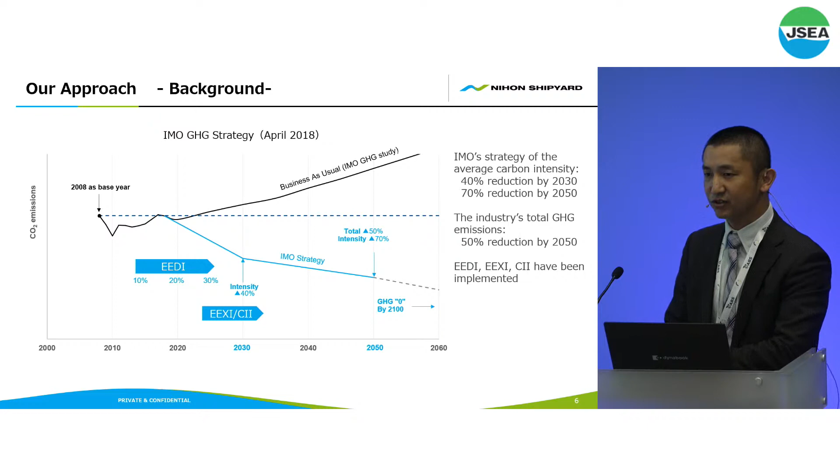We can't discuss net zero society without carbon neutral and low carbon fuels. However, methanol and ammonia require significant time and cost to expand production and supply chain. Therefore, heavy fuel oil, including biofuel, and LNG, will keep dominant until 2030.

So we will focus on developing better EEDI vessels using conventional fuels, while developing dual fuel vessels to meet market demand. That's our approach.

Improving propulsion performance is always very important regardless of fuel used. We have a lot of experience and know-how over many decades to improve ship's hull form and energy-saving devices.

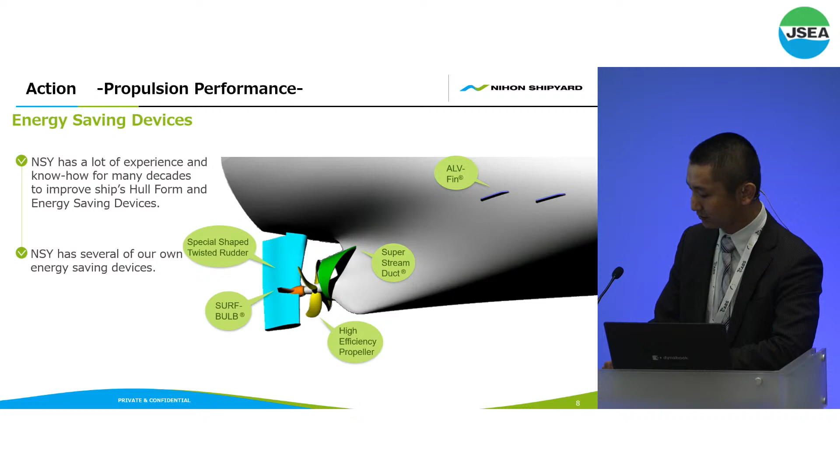These are our energy-saving devices. These devices improve energy efficiency, and we continue to improve and consider the combination of the devices.

In addition, we have been working on reducing additional resistance due to wind and waves for more than 20 years. To reduce added resistance due to waves, we developed the most suitable bow shape for each occasion.

These are our original bow shapes. The Leadge bow and SP bow are new types, and the Axbow is a slightly older type.

We confirmed the performance of the Axbow. The speed loss in waves is clearly better than the ordinary bow.

This is one of our latest accommodation houses. The round shapes of the accommodation reduce additional wind resistance.

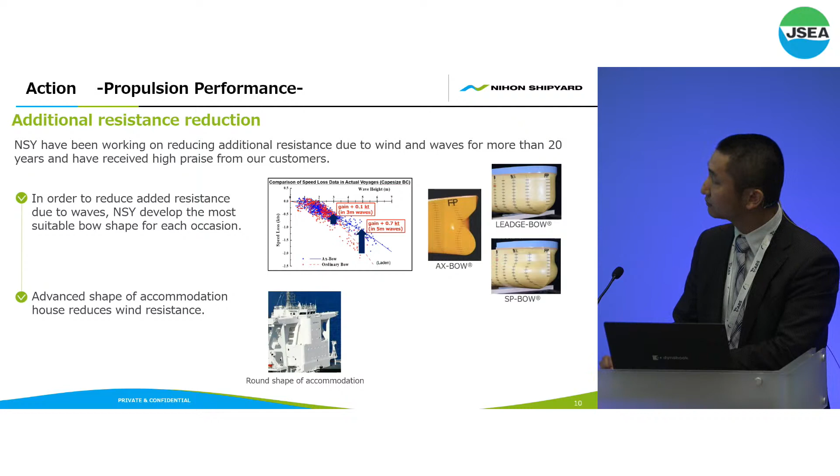As I explained earlier, we are also developing alternative fuel vessels. For LNG, we are building the car carrier and Newcastle Max.

For methanol, our group company, Minami Nippon Shipbuilding, built a methanol-fueled MR tanker in 2016. Recently, we are studying the methanol dual-fuel bulk carrier according to the customer's request.

For ammonia, Nihon Shipyard is developing ammonia dual-fuel vessels in two projects. We are developing an ammonia dual-fuel ammonia LPG carrier in the Japan brand engine project. In this project, Japan Engine Corporation is developing the main engine, and IHI Power Systems is developing the auxiliary engine.

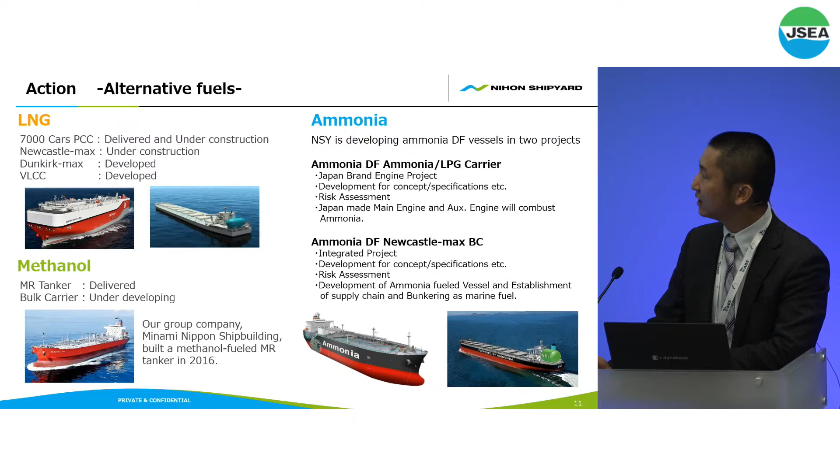In the other project, we are developing an ammonia dual-fuel Newcastle Max bulk carrier. In this project, MAN as the licensor and Mitsui E&S Machinery as the licensee are developing the main engine.

On the other hand, we started feasibility studies on several GHG reduction technologies. These are not our own technologies; we are studying them through discussion with the manufacturers. For example, we confirmed the installation availability and effect of the onboard carbon capture system for a Suezmax tanker.

I will explain our monitoring system. The Sea-Navi 2.0 is our cloud-based subscription service which provides a data monitoring and operation support integrated platform for voyage optimization and safety operation. We can also use the Sea-Navi monitoring data to evaluate GHG reduction technologies in actual sea conditions.

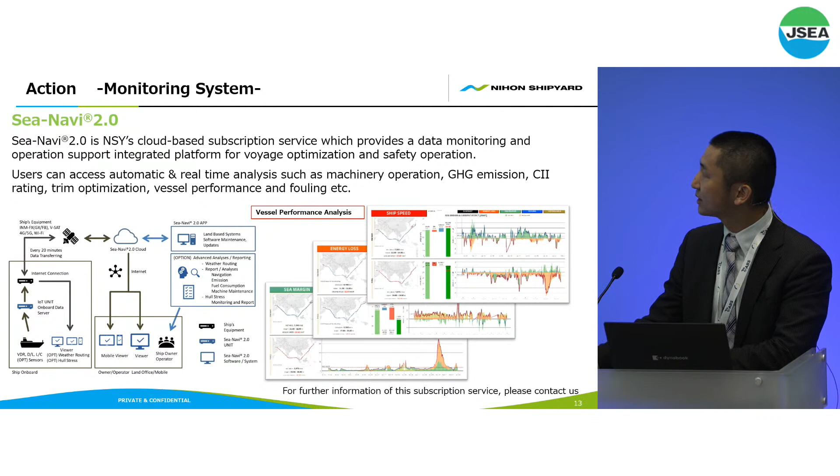We also implement other activities for net zero. One of them is the liquefied CO2 carrier. Mitsubishi Shipbuilding and Nihon Shipyard have started a joint study for the development of an ocean-going LCO2 carrier.

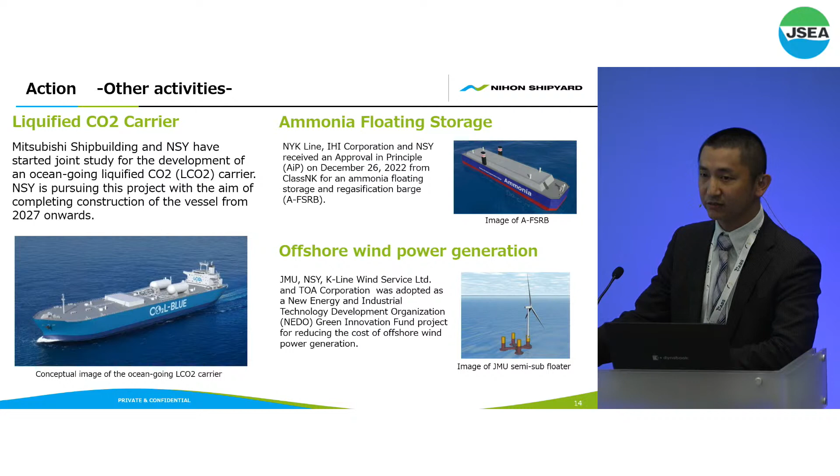So this is the summary. Please remember Nihon Shipyard is a joint venture company between Imabari Shipbuilding and Japan Marine United, and please remember the meaning of Nihon. This is our approach: we will focus on developing better EEDI vessels using conventional fuels while developing dual fuel vessels to meet market demand.

That's all for my presentation. Thank you for listening.

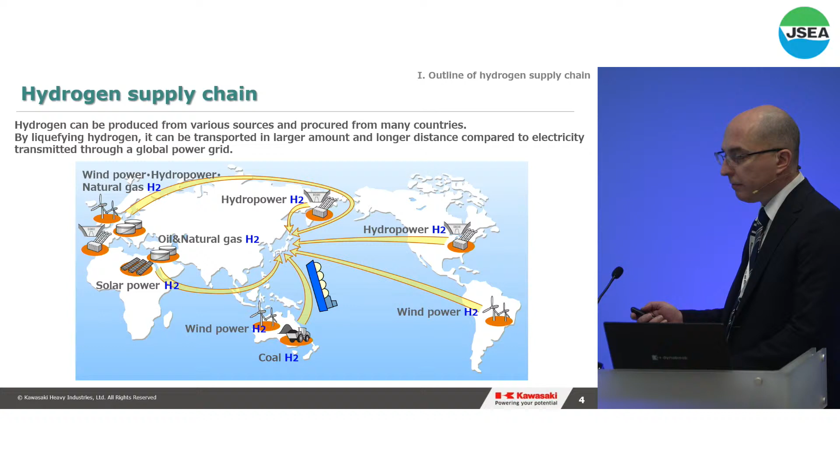This is the concept of a CO2-free hydrogen supply chain, which was announced in 2010. The objective is to establish a stable supply of hydrogen while suppressing CO2 emissions in the process of production, transportation, storage, and utilization throughout the entire supply chain. Hydrogen is to be produced using renewable energy sources and also from fossil fuel paired with carbon capture storage systems, in which all the CO2 produced is stored underground. Then the produced hydrogen is to be transported to Japan by liquefied hydrogen carriers, finally reaching the consumers, which includes power plants, transport, and industry.

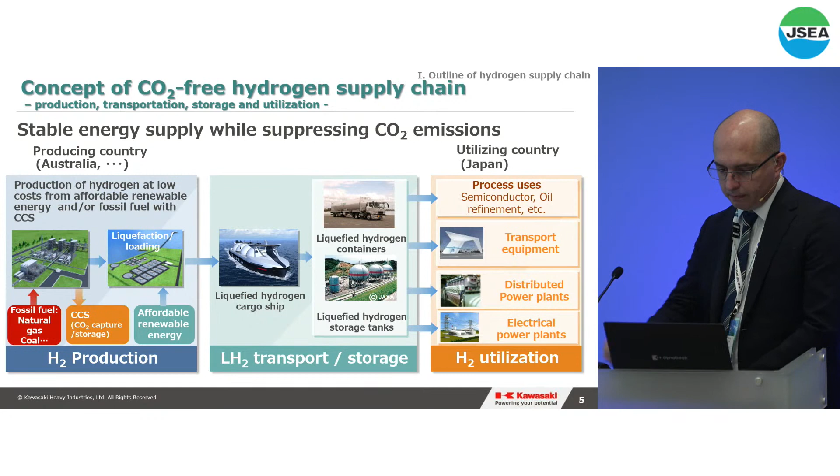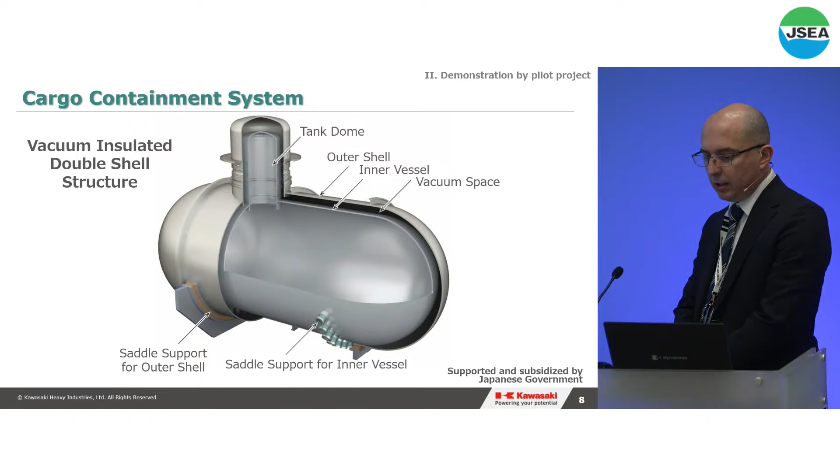Here are some details about the cargo containment system. The temperature of liquefied hydrogen is very low, at minus 253 degrees Celsius, and the latent heat of hydrogen is also very small. Therefore, a high-performance insulation system is required. To deal with this, the tank was designed with a double wall structure. This cargo tank is categorized as Type C by the IGC code and is designed so the boil-off gas during the entire voyage can be fully accumulated. Regarding materials, the inner vessel of the tank is made of stainless steel, and the saddle support is made of glass fiber reinforced plastics, which has excellent thermal insulation and strength. With these specifications, we can suppress heat ingress and make possible long-distance marine transportation of liquefied hydrogen.

After construction of the ship, we conducted several demonstration tests in 2 phases. In the first phase, tests of loading and unloading were carried out with liquefied hydrogen for the first time, followed by tests during a full load trial voyage in Japanese coastal waters. In the second phase, technologies for long-haul transportation were tested while transporting liquefied hydrogen between Hastings, Australia, and Kobe, Japan. Through this series of demonstration tests, we successfully verified and validated all aspects of long-haul transportation, including the safety and technologies used in this vessel.

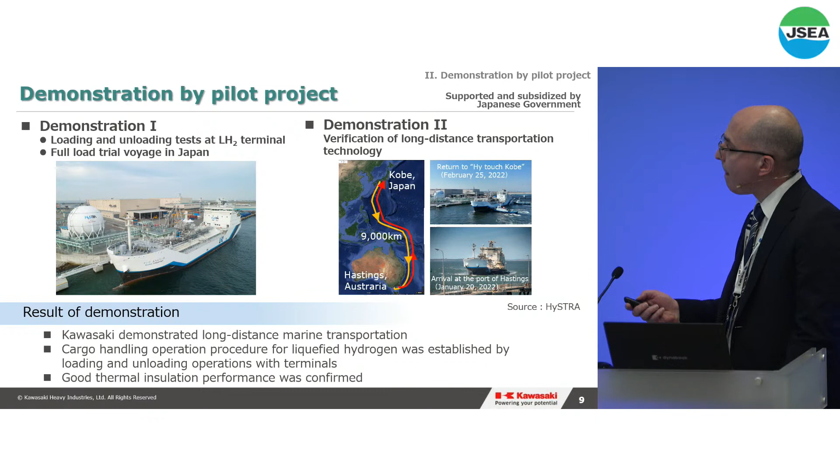So moving on, in the last part of the presentation, I would like to explain our actions to the establishment of a commercial scale hydrogen supply chain.

Now we are proceeding with the hydrogen supply chain commercialization demonstration, a project supported by the Japanese government's Green Innovation Fund, running from 2021 to 2030. In this project, we will demonstrate a series of aspects of the international liquefied hydrogen supply chain, from manufacturing to transportation and storage of carbon-free hydrogen, on a scale of several tens of thousands of tons per year. Our target is to achieve the first full-scale commercialization of hydrogen after 2030, and to show that the technologies to scale up are available, including large-scale marine transportation with competitive costs.

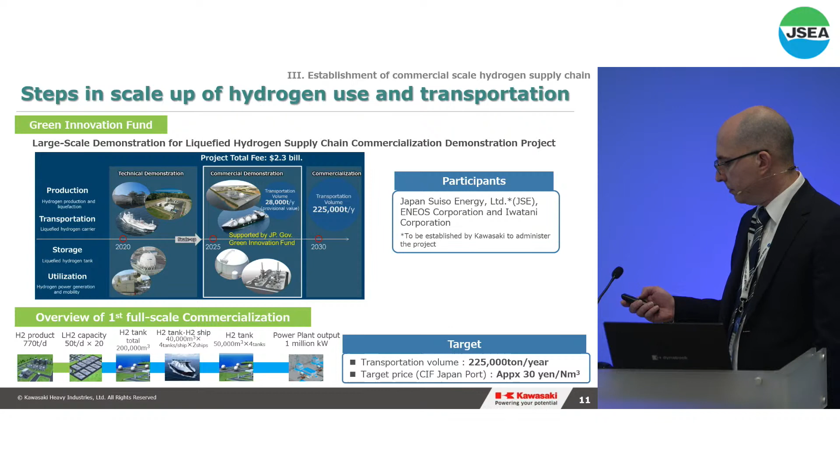For the commercialization demonstration project, Port of Hastings in Australia and the Kawasaki coastal area were selected. In addition, an MOU aiming to advance the establishment of a liquefied hydrogen supply chain between Japan and Australia was signed by major Japanese companies at the Asia Zero Emission Community in March 2023.

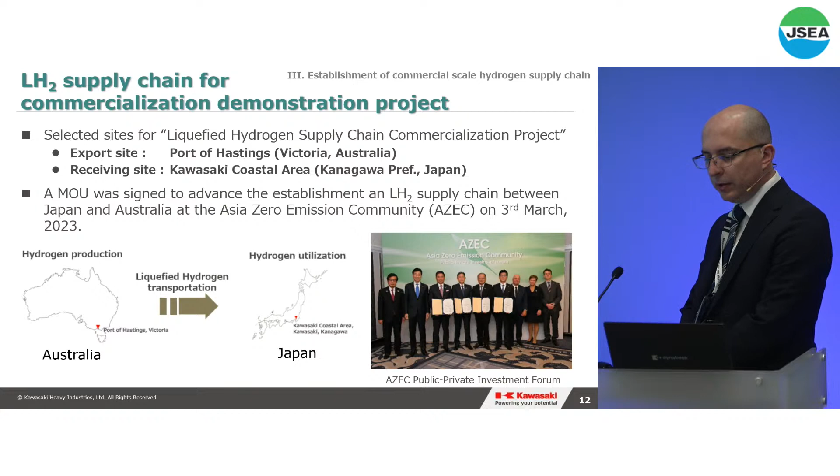Starting last year, we built a half-size tank at our Sakaide shipyard, about 25 meters in diameter, where we carry out gas replacement, cool down, and heat up tests. Through these tests we were able to establish the operational procedure for this newly developed cargo containment system, and confirmed that the heat insulation performance can be achieved as planned.

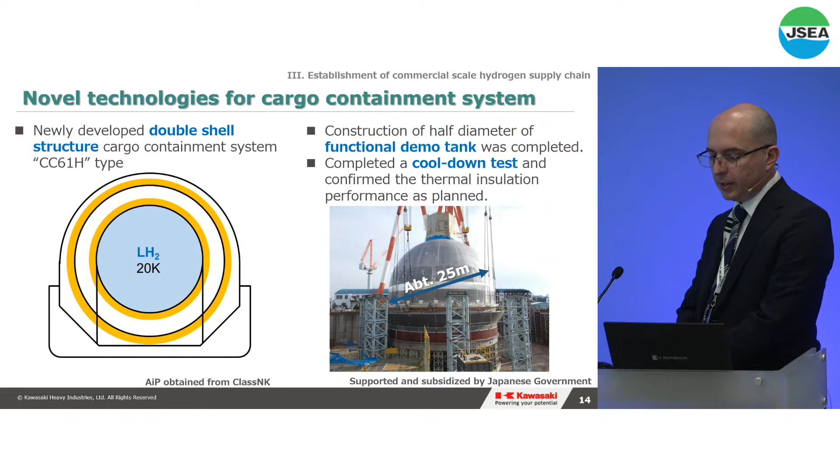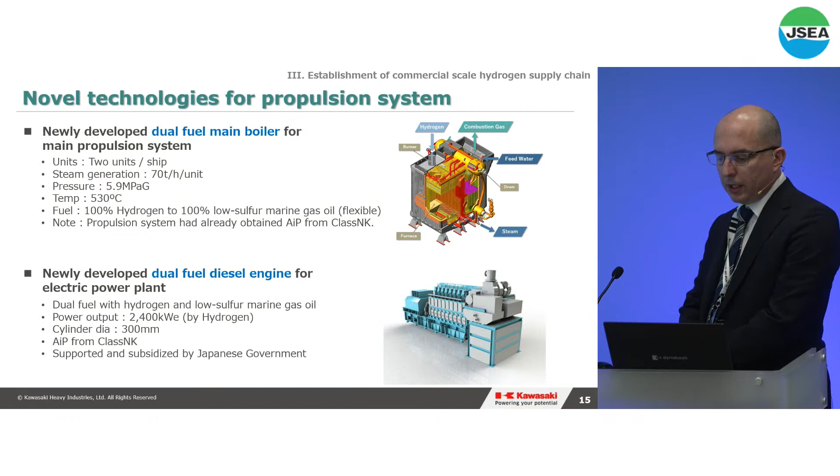Another novel technology here is in the propulsion systems. The two major pieces of equipment are the hydrogen dual fuel boilers and the hydrogen dual fuel engines. With the use of hydrogen as fuel, zero emission can be achieved. Regarding the boiler, the key component is a hydrogen burning burner, for which the tests were completed in 2021. As for the engines, we are developing a hydrogen reciprocating engine for the electric power plant of this vessel. This engine will be installed on the large-scale ship for demonstration purposes. Both are core technologies developed by Kawasaki.

In addition, we are sure that we can develop middle-sized liquefied carriers in accordance with market needs. We are considering the possibility that, in the early stages of commercialization, vessels with capacity ranging from 20,000 to 60,000 cubic meters will become the major size in the liquefied hydrogen market. These middle-sized carriers will be developed by fostering the technologies and expertise obtained through the development of Suiso Frontier, our small vessel, and the large liquefied hydrogen carrier.

We believe our own wide range of technology will cover various sizes of cargo containment systems. An optional cargo containment system can be selected according to project requirements, by scaling up our small tanks or scaling down our large tanks, which are two existing and proven cargo containment systems.

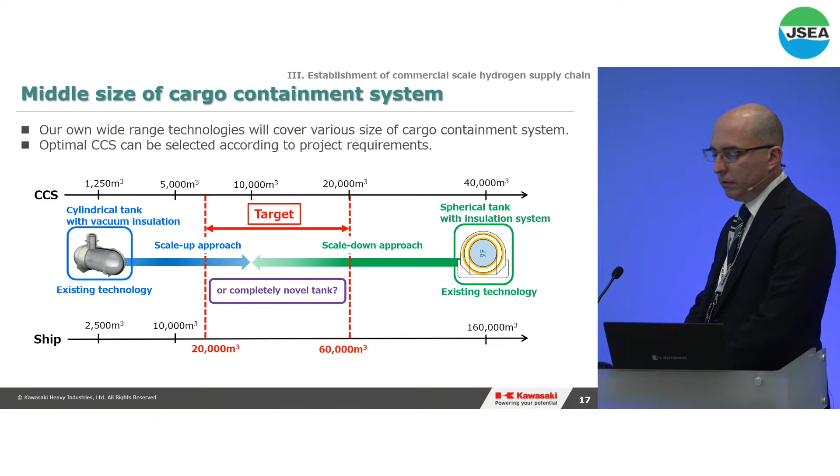To summarize my presentation, we believe these are the keys to the future. First is the hydrogen supply chain. As I said, hydrogen can be produced around the world from a wide range of energy sources, and we believe the liquefied hydrogen carrier is one of the key components to establish the supply chain, because it can transport a large amount of hydrogen efficiently.

The second key point is the Kawasaki pilot project. Kawasaki has completely demonstrated long-distance marine transportation of liquefied hydrogen with its first ship, Suiso Frontier. We also demonstrated that the cargo handling system is functional, and demonstrated the procedures for it during loading and unloading operations.

The third point is the scale-up of the ship. We believe scale-up is essential to reduce hydrogen costs. A wide range of technologies to achieve this scale-up will be available soon, and we are sure that Kawasaki can provide various sizes of liquefied hydrogen carriers, from small to large, in accordance with market needs. So Kawasaki will use its own advanced technology to contribute to a carbon-neutral society.

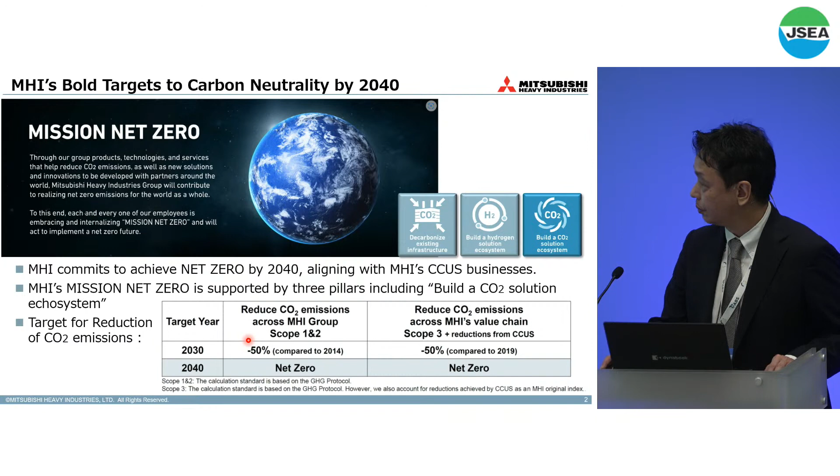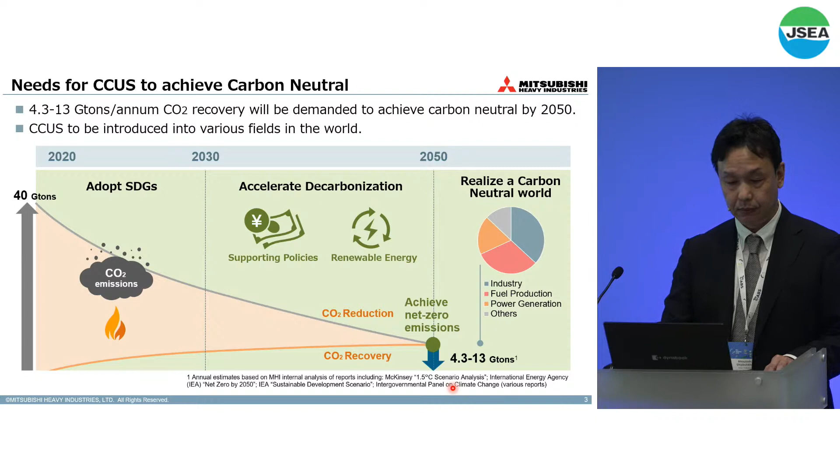Next, let me explain our idea for the CCUS framework. We think one of the reasons why CO2 recovery is progressing slowly is that the destination of captured CO2 is limited. For this reason, we have begun efforts to cover the entire value chain, not only for capture, but also for transportation or conversion. Let's say CCTUS, although T is not included generally - we address 3 frameworks for these 4 areas.

The first one is contain. This framework covers capture and storage. In other words, it means a method by which CO2 is not emitted into the atmosphere. Currently, our group has a global share of more than 70% in CO2 capture from flue gases, and we believe this is our strong point.

The second one is connect. This means connecting each component in the CO2 entire value chain in order to establish an extensive and economical ecosystem. We think connect is very important to achieve the entire CO2 value chain, and liquefied CO2 carriers are included in this framework.

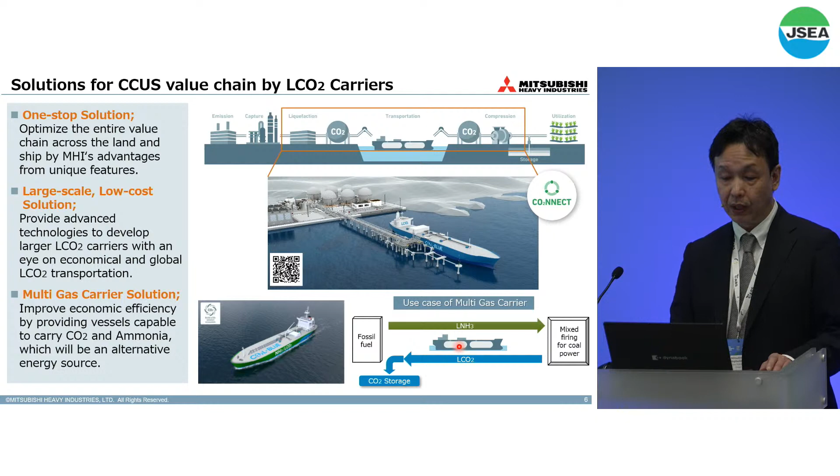Third point is the development of multi-gas carriers for ammonia and liquefied CO2. Most existing energy carriers, such as crude oil tankers, LNG carriers, and LPG carriers, are laden only in one way and return in ballasted condition. So we are focusing on developing multi-gas carriers that can carry ammonia and liquefied CO2 in a round trip, optimizing total economic efficiency of transportation and providing wide flexibility in fleet management.

Let me explain the technological development for large-scale liquefied CO2 carriers a little more. Mitsubishi Shipbuilding has accumulated various advanced technology through the construction of many liquefied gas carriers. We believe these technologies, such as numerical simulation, gas handling technology, and material evaluation technology, could be effectively utilized to resolve technical issues when large and economical liquefied CO2 carriers are developed.

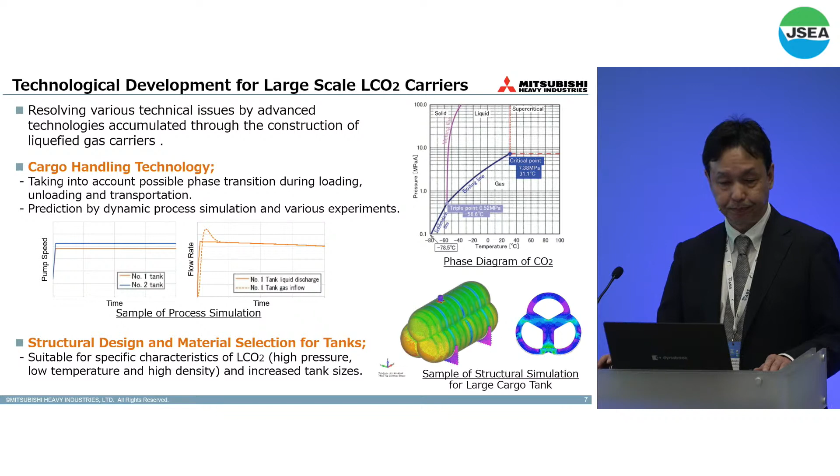In addition to the challenges introduced so far, Mitsubishi Shipbuilding has already started building an actual liquefied CO2 carrier for a Japanese demonstration project of CO2 transportation. The vessel, currently under construction at our Shimonoseki shipyard, is scheduled for completion at the end of this year and will start transportation of liquefied CO2 from Kyoto to Hokkaido from 2024. We expect various knowledge and information will be obtained through this project, integrated into gas handling technologies for tomorrow's large-scale, low-cost transportation by liquefied CO2 carriers.

In this slide, I'd like to introduce our activity on development of an onboard CO2 capture system. As a joint project with Kawasaki Kisen and ClassNK, the onboard CO2 capture system was mounted on an actual vessel and demonstrated for the first time in the world in 2021. In this demonstration project, Mitsubishi Shipbuilding conducted marinization of the system using our group's CO2 capture technology for land use. As a result, CO2 capture function from ship's exhaust gas was confirmed to achieve prospective performance.

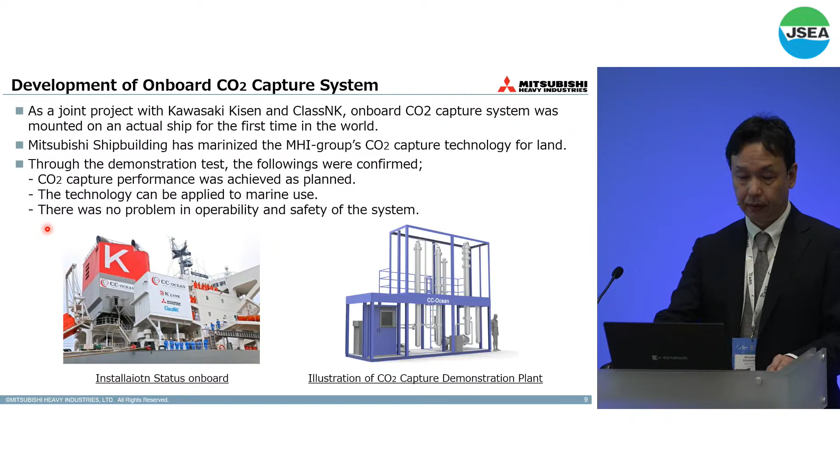Lastly, let me introduce Mitsubishi Shipbuilding's future vision named Marine Future Stream. This is our vision for 2050, setting the goals of a safe and secure future for society and decarbonization of the maritime economy. We will realize this vision by generating ideas for marine-related innovation through backcasting and bringing new technologies and services to life. The detailed pamphlet is available at the Mitsubishi Shipbuilding booth, so we would be very happy if you can visit our booth after this.

As we know, the International Maritime Organization aims to reduce emissions from international shipping by 2050, and this goes for us all. So what can we do? I think we have to find ways to practically implement from ideas to solutions, from test and demonstration projects to commercially viable products, and that is not always easy. I am so impressed by the 2050 roadmap you have towards net zero shipping in Japan for international shipping, and I'm very interested in following Japanese companies and how you tackle the 2050 challenges. The 2050, 2030 challenges are a shared challenge, and where there are common challenges, there should also be ample opportunity for more collaboration.

So I'm thankful for the opportunity to give an overview of the maritime sector in Norway, together with some encouragement for future partnerships and collaboration on environmentally friendly technology in the maritime sector.

The ocean and ocean industries are very important for job creation in Norway, as in Japan. Traditionally, the maritime industry has accounted for 30% of Norwegian export earnings, excluding oil and gas. More recent figures tell us that Norway's sixth largest export market for maritime solutions, equipment and services is Japan, a very important market for Norway, not only because of exports but because we have many important and dear collaboration partners in Japan. An important point to mention today, to understand the nature of the industry, is that it is a bit cyclic in its nature, as I will explain.

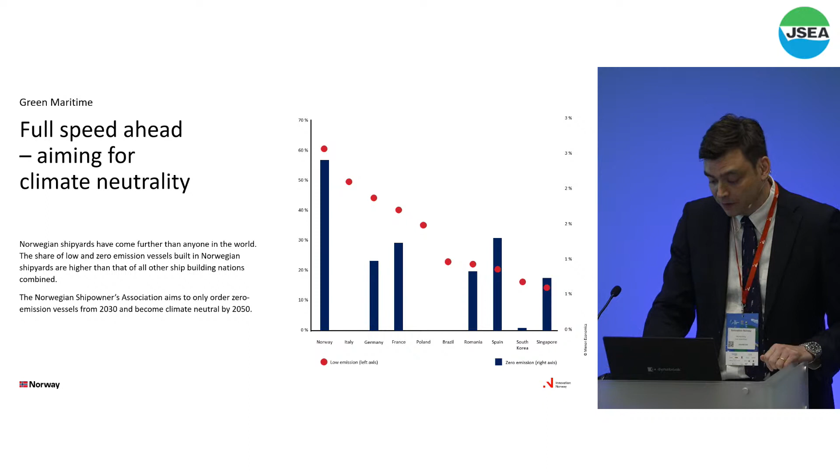Very short about the framework that we have to operate in Norway, and I like to call them drivers for change - all markets have change drivers that speed up change. We see that government ambitions in Norway are also paired with government support. When policymakers set ambitious regulations that stimulate and stipulate environmentally friendly ship use, not only piloting and testing but also commercial implementation in the maritime transport infrastructure, we see that in Norway, regulations can actually stimulate innovation.

The example I will use is the environmental requirements in the ferry tenders in Norway, and that has been a very strong driver in the Norwegian market.

In the ongoing green transition, we have many chicken and egg situations. Let us take one example from the onshore power infrastructure support for electric vessels. The phasing in, or the ambition for phasing in electrically powered ferries and speedboats, has been a key part of the Norwegian government's ambitions and goals for fossil-free public transportation by 2025, and also halving emissions from domestic shipping by 2030. So how are they doing it?

There is a requirement of low or zero emission solutions for ferry and speedboat services in the national and county transport service network. There is public support for the development of electrically powered ferries and speedboats, and support for establishment of dedicated charging facilities on ferry and boat routes. Similar schemes exist for shore power, where support can be applied for investments in infrastructure, pre-projects, and vessel conversion. It is Enova, the Research Council, and Innovation Norway that have been funding agencies in Norway for this.

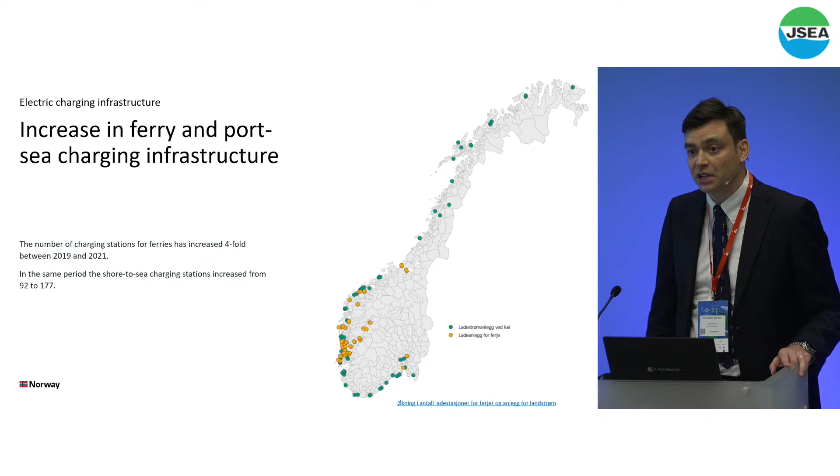Since between 2019 and 2021, the number of charging stations for ferries has increased fourfold in Norway, and in the same period, the number of shore-to-sea charging stations has increased from 92 to 170 or 177. Now the question remains, how can we do more on a larger scale to accelerate this development and commercial implementation of climate-friendly technology in the maritime sector.

This is very important for the private sector, turning ideas into business. Many, if not most, of the world's first projects in Norway are collaborative projects, with many non-Norwegian brands and companies involved, as can be seen among the members of the clusters. I believe leading projects come from selecting the best technology and the best partners, and I believe we have ample grounds for finding good collaboration opportunities between Norwegian and Japanese companies as well.

As you may know, for strengthening the maritime commercial relation between Norway and Japan, we have a framework for collaboration already in place. This is an MOU, Memorandum of Understanding, between the Norwegian Ministry of Trade, Industries and Fisheries and the Japanese Ministry of Land, Infrastructure, Transport and Tourism from 2011. So this gives us a mission and signals what we should do, and that is to support you in finding partners and collaboration.

This is why we're honored to be able to interact with you here today. We are thankful to the Japan Ship Exporters Association and other involved companies for creating this arena in the bilateral Norway-Japan dimension here today, where companies can share and meet each other and find new partners for tackling the same environmental challenges. Hopefully we can see more Norway-Japan partnership in the future. You can get in touch with us in Tokyo, where we are located, and we will do our best to facilitate contact between companies in Norway for you as well. But of course, we hope you will take the opportunity at Nor-Shipping to engage directly.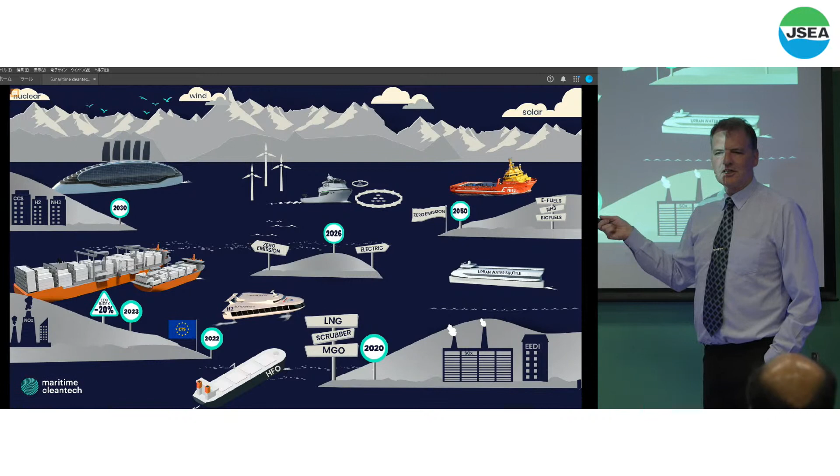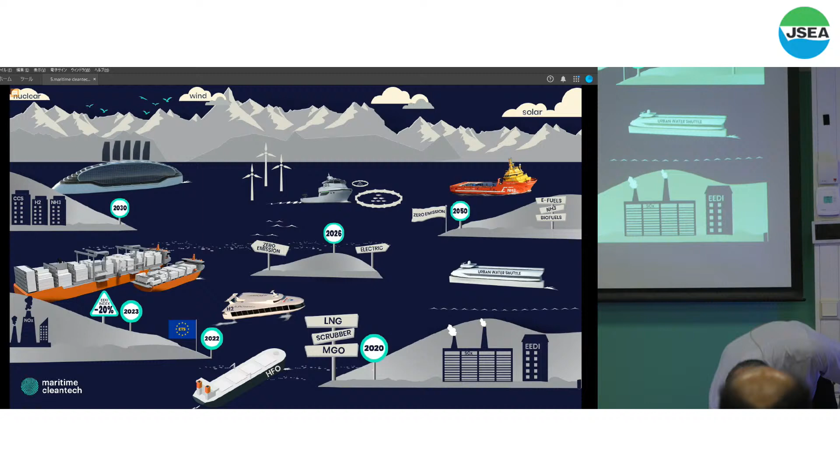All the different shipping segments have different challenges. So you cannot just say that you have one solution because it has to do with the operation profile. Some vessels are going short, some vessels are going long, some vessels are going just from one port to another, some are going around the world. So you have to find the best way going ahead.

Can I just put this one, how do I move the slides? Maybe I was so nervous that I dropped it. I don't know. It's working now. Yeah, but I can still start. So this is the way that the ship owners have to look ahead. This is the challenge now, and that is where we need to collaborate. Is it possible to change? Can you help me to change the?

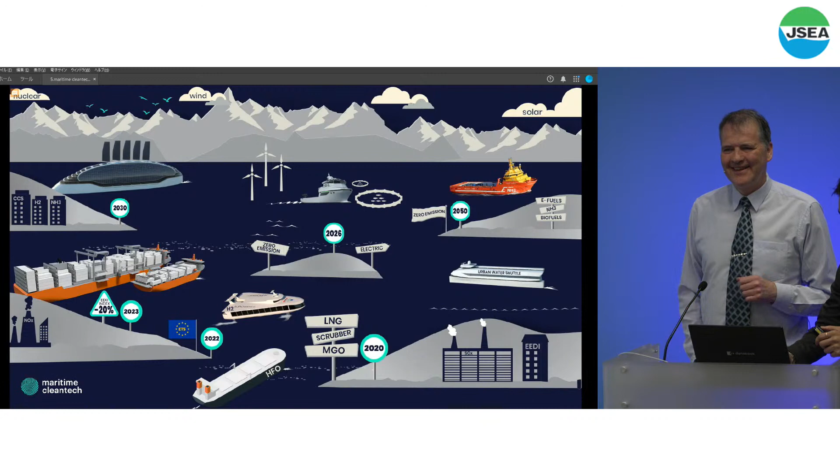Yeah, so this is just another, maybe that should be me, I don't know. So again, if you are doing this yourself, this is the challenge you see. And if you are doing it yourself, it will be somewhat overwhelming.

So what we really try to do in the clusters is to have collaboration. So Maritime Cleantech and the cluster, we see ourselves as an innovation arena or facilitators for our members. So if they have some very good concept ideas, we bring them forward into this different arena. We discuss it with the partners which are interested in the different areas.

So we have offshore wind, emission-free fjords, retrofit solution, deep sea logistics, and so forth. But the key word, I think that is the key word for at least Maritime Cleantech, is that we have had collaboration. Without collaboration, we are not able to move forward.

So again, I will just give you a sneak peek of the different projects we have done the last 10 years. And as you can see, we have tried for the different shipping segments with different solutions for the energy carriers, like batteries, ammonia, hydrogen, wind, and so forth. Because there are different solutions for different shipping segments.

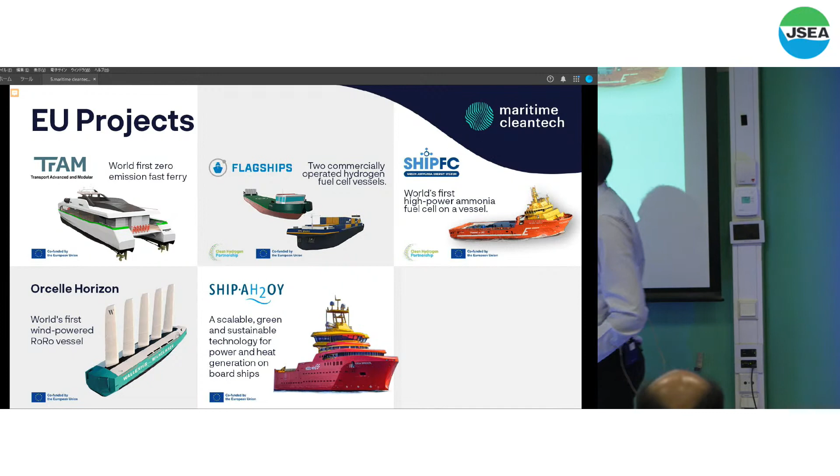Then we have, I think it's a really cool project, Orcelle Horizon, the world's first wind-powered ro-ro vessel. It's Wallenius Wilhelmsen going from Asia to Europe with Volvo cars, to see if it's possible to go by wind. So that depends on the sea.

And then the next one is Ship Ahoy, a scalable green and sustainable technology for power and heat generation on board ships.

And the last one I'll give is called Ship FC, the world's first high-power ammonia fuel cell on a vessel. Today I see I have one of the partners in this Horizon Europe project, so I want to invite him. They are also part of this maritime cluster, so he can tell us a little bit about Ship FC, the company called Alma, and also how he thinks we are working in the Maritime Cleantech cluster. So Torleif Stokke, the floor is yours.

You probably don't need this one, but I dropped it, so I think I'll put it here.

My name is Torleif Stokke. I'm working in Alma Clean Power, a company aiming to solve the problem for deep sea shipping and zero emission. How are we going to do that? We are going to do that by developing solid oxide fuel cells, which have very high energy efficiency and can operate on multiple fuels.

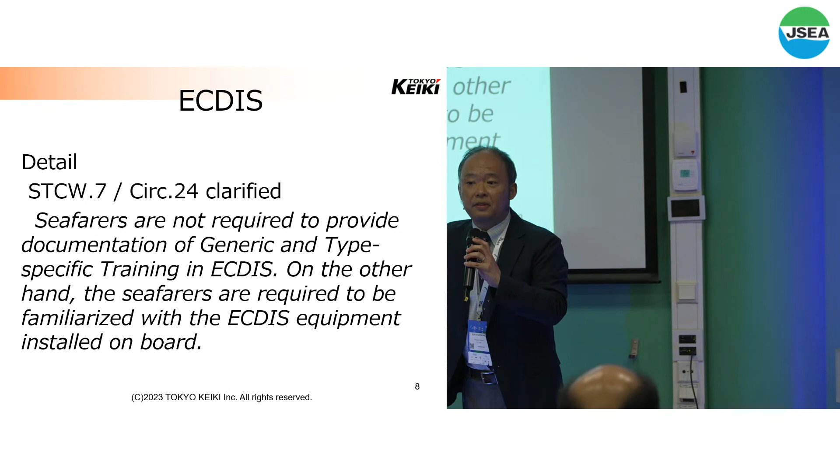This is because STCW clearly states that seafarers are not required to provide documentation of generic and type-specific training in ECDIS. However, on the other hand, seafarers are required to familiarize themselves with the ECDIS equipment installed on board. You have to be able to use the ECDIS clearly and smoothly.

For example, here I bring some documentation from the MAIB in the UK. One of the accident reports clearly mentioned deck officers were unable to safely navigate using the vessel's equipment. The accident happened due to an unfamiliarized officer.

The MAIB openly publishes documentation on this kind of accident. You can see this on their website, and they freely make this documentation available for use.

So when you come to us at Tokyo Keiki, what can we do? We started promoting our new ECDIS last year, which includes tutorial movies built into the ECDIS itself. Also, in case a port state control officer comes to your vessel to check the certificate, this ECDIS can issue the COC on its own.

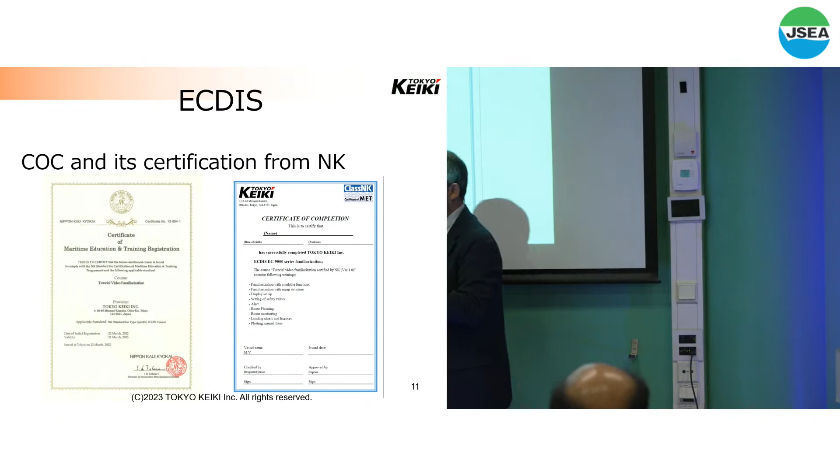This is the COC, but you have to watch all the movies, 13 or 14 of them. If you don't watch them, the certificate will not be issued. This system is certified by ClassNK, so it's good to use. You can watch the movies many times and familiarize yourself with the ECDIS.

That's the ECDIS. Next, we understand we also have to save energy, so this is another option from Tokyo Keiki, from the autopilot side.

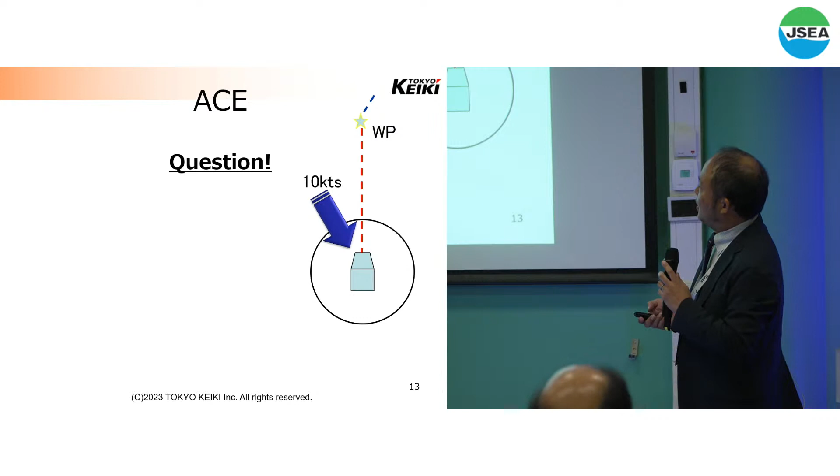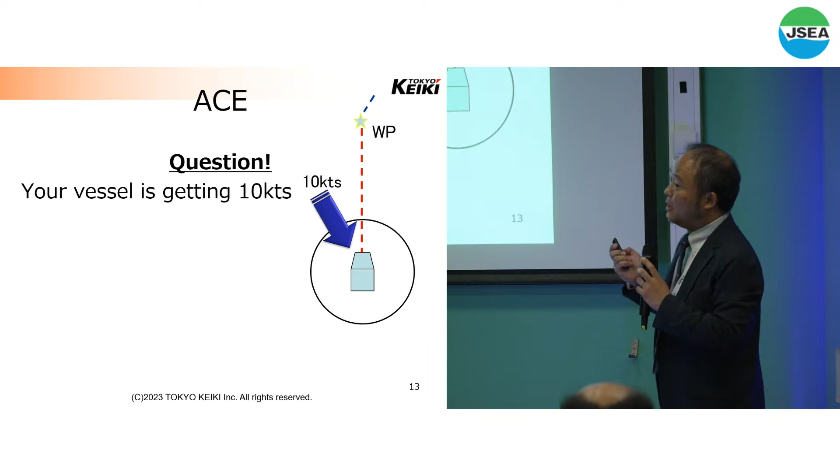Next question: is there any active or former deck officer here? No? Okay. If your vessel has a 10-knot wind coming from 10 o'clock off to the side, how will you command or steer the vessel? How will you bring your vessel back?

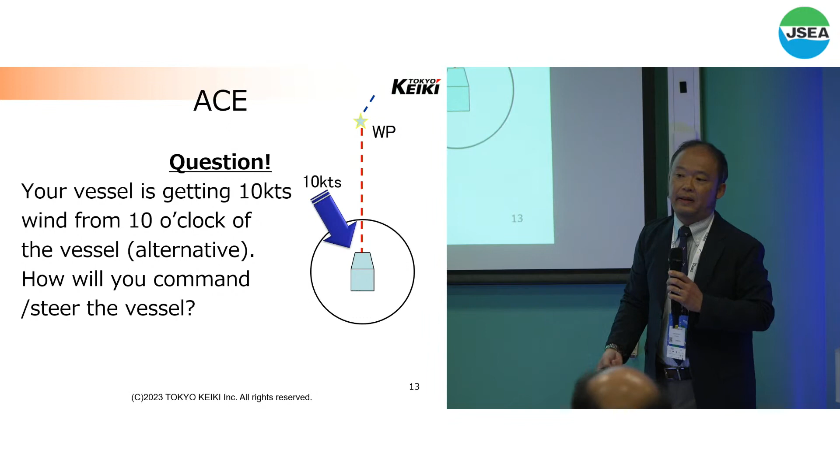In general, I guess the vessel will drift to this side without any operation. Then the course will change its heading to put the vessel back to the original course. This is the traditional way. However, this wastes distance, fuel, and time.

Again, this is the traditional operation: once the vessel drifts to one side of the course, the officer will change its heading to put the vessel back on the original course. However, we have a new function.

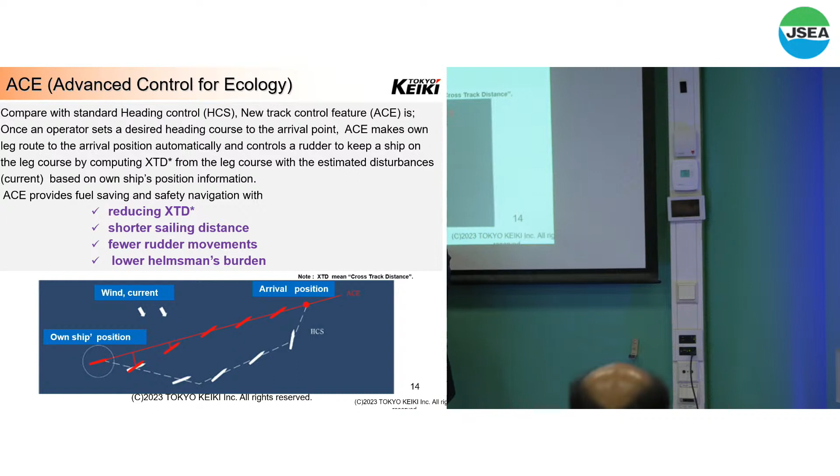You input the arrival position's heading, and this autopilot function will calculate the ship's heading and rudder angle, bringing the vessel straight to the destination.

But we have a concern. If this function is difficult to use, I guess the crew won't use it because it's too complex. Or if it's not really efficient, of course no one will use it. It must be simple and efficient.

So here I bring a video to show how easy it is to use.

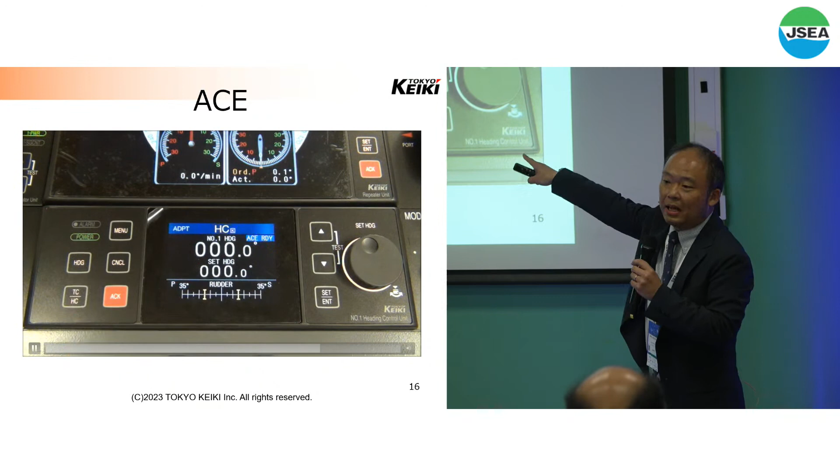Now we are using the traditional function, heading control. Just bring the vessel like the white vessel in the previous slide. But if you go this one, just press this button. You can enter the next advanced mode, ACE mode. Then you push this button again to put back to original.

If your deck officer can use an iPhone, Galaxy, or smartphone, I guess they can use this function very simply.

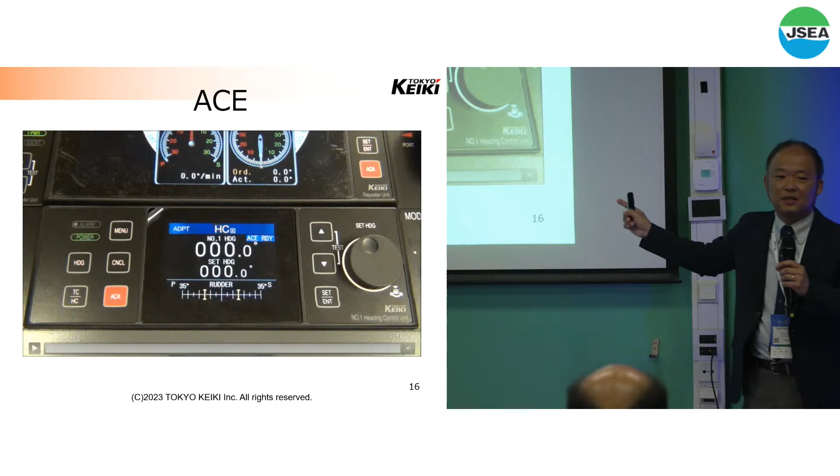Then efficiency, next concern. We just got last year from BV, Bureau Veritas, a performance test of the energy reduction by this function. We got this attestation. If we have strong tidal current or ocean current, the fuel efficiency goes higher.

And this function, it is possible to install for your vessel now if Tokyo Keiki Autopilot is on board.

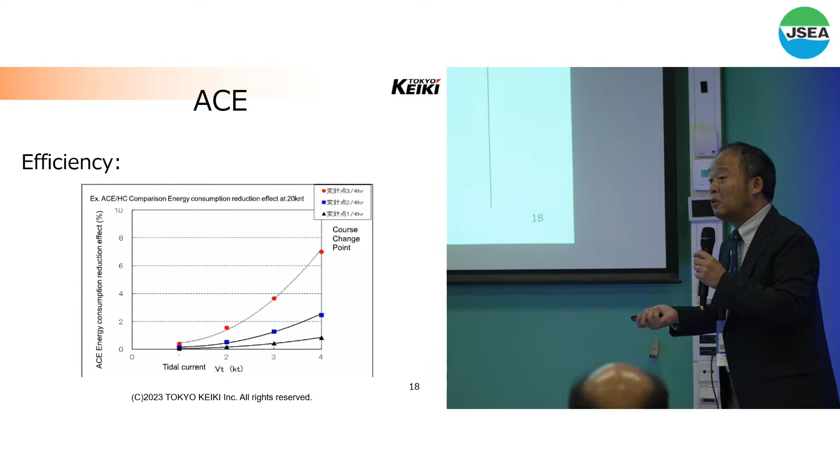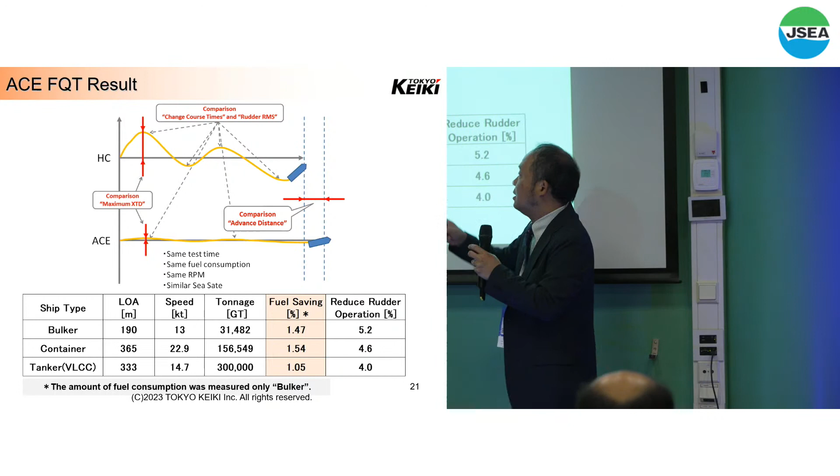But you think, is it really? It's just calculation. So we did an actual ship test. This is the result. Bulk carrier, 1.47%. We compared 2 hours, traditional and new function, one officer changing over the function. Overall about 1% to 1.5% fuel saving was confirmed for all vessels.

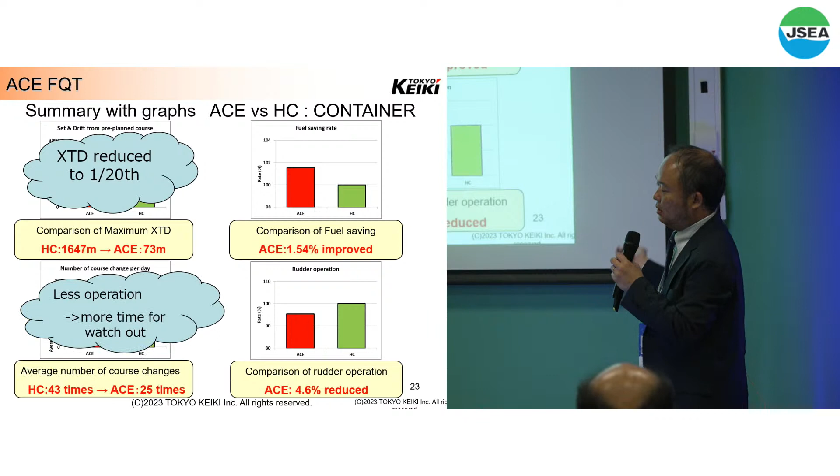Actually this is a graph, but I would like to bring the cross-track distance, which means the distance between the original route and the actual ship's position. For example, XTD in a bulk carrier goes to 1/10, then operation itself goes to 1/6 or more or less. Same manner for other vessels, XTD goes to 1/20, or same manner for the change in operation itself, we reduce for VLCC as well.

So if we just calculate the bunker oil at $420, actually now higher, you can save this amount in a year, just by using this function.

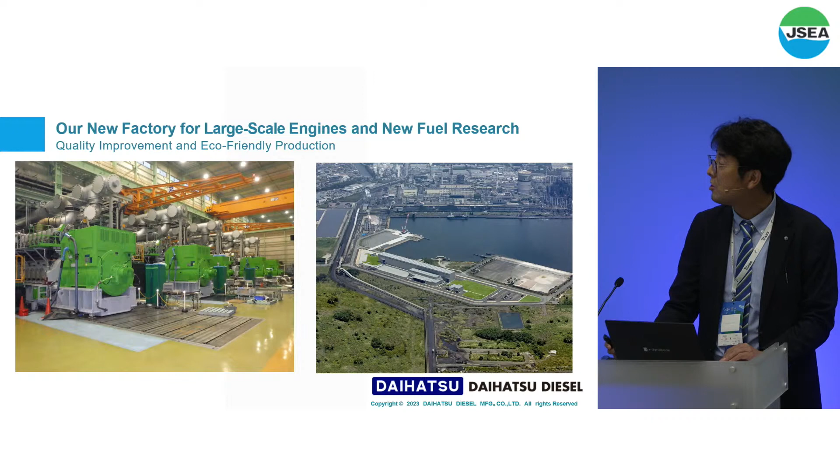Himeji factory has its exclusive berth, which enables direct loading onto the ship for maritime transportation. Engines are placed on a self-propelled transport vehicle and transported to the berth after their test running. A crawler crane installed on the berth lifts the engine to load onto the ship. This delivery process does not require disassembling the engine, and it contributes to maintaining the quality of the engine.

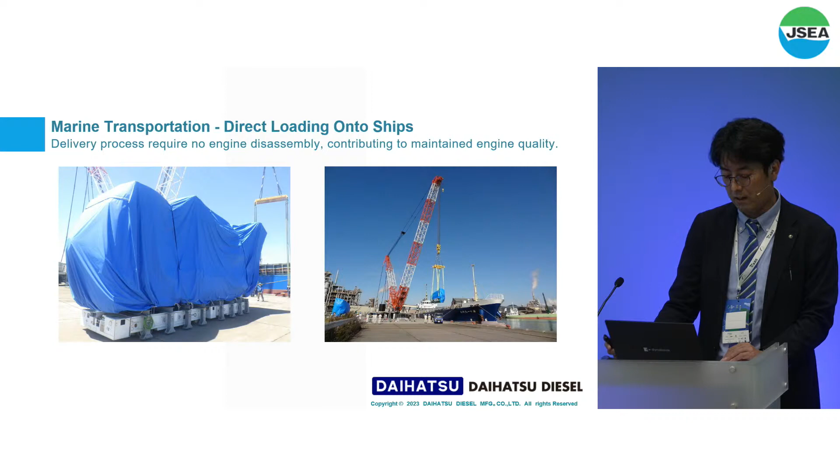We regard it as an urgent challenge in the maritime industry to address global warming. We are making efforts to reduce carbon dioxide emissions from engines.

Daihatsu Diesel has manufactured numerous engines of various output, which have been chosen and operated by our loyal customers based on reliable and high-performance diesel engines. We have been developing natural gas-powered engines.

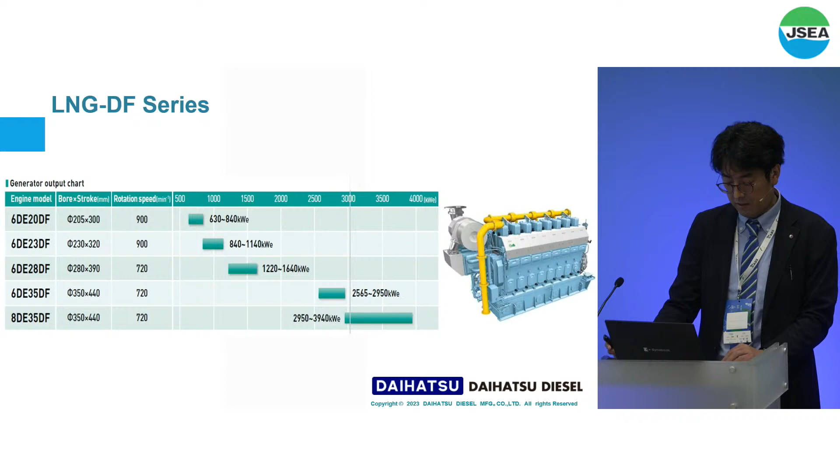As a natural gas-powered engine, we have delivered DE-28DF engines for JAXA, Tsukuba Space Center, for land-based power generators, and for large LNG fuel PCC.

We are currently delivering the DE-35DF engine for mega container ships, and DE-20DF and DE-23DF engines for large bulk carriers. We have delivered over 40 DF engines so far and have received orders for approximately 100 DF engines.

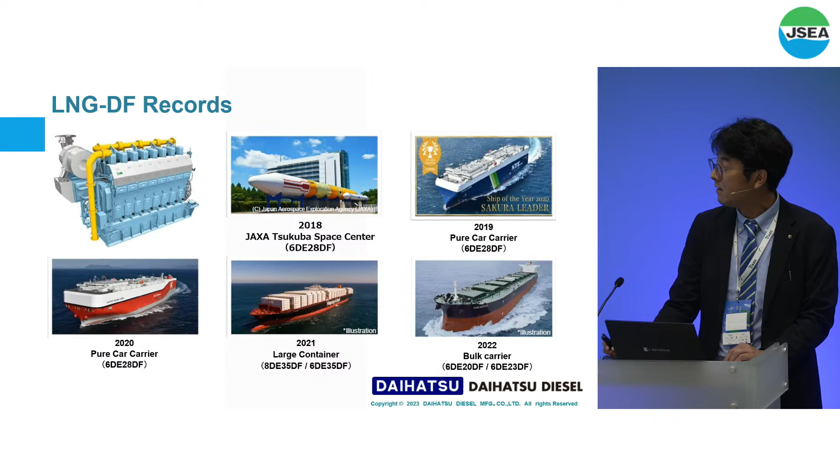We are also working on reducing methane slip, which affects greenhouse gas. At the next stage of developing LNG-powered engines, we are making efforts to achieve zero carbon dioxide emission from our engines.

As part of our GHG0 initiative, we have installed a single-cylinder test engine in our company for conducting combustion research on new fuels. We are also actively engaged in collaborative research with worldwide research institutions and universities.

Here is a roadmap for future fuel compatibility. We aim to deliver our first commercial methanol-powered engine by the end of 2025. For ammonia, we are targeting commercialization in the late 2020s.

Due to safety considerations regarding the toxicity of ammonia, we plan to construct a new independent and isolated building within our Himeji factory. However, as this will take several years, the development timeline is delayed if there is a need for an ammonia engine by the mid-2020s. We will address it through the READY program.

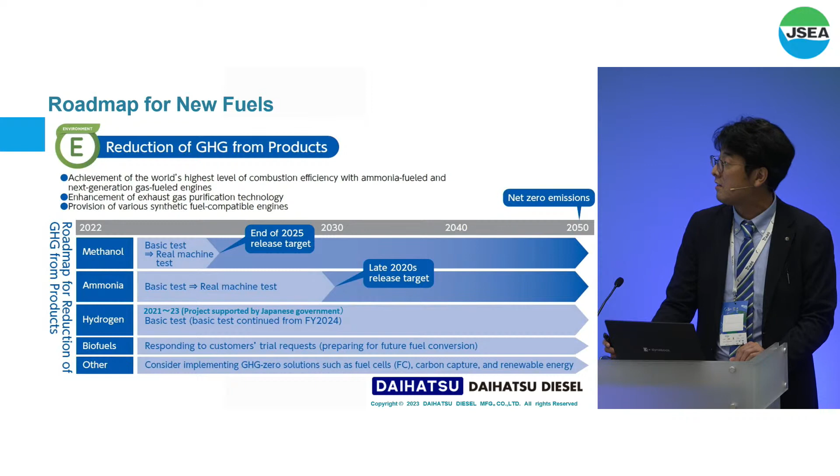Toyota has introduced Mirai, a vehicle equipped with hydrogen fuel cell technology, into the market. We, Daihatsu, as a member of the Toyota Group, are also conducting research and development to develop fuel cell technology for maritime use. Mirai means future in Japanese, and together with Mirai, we aim to create a future.

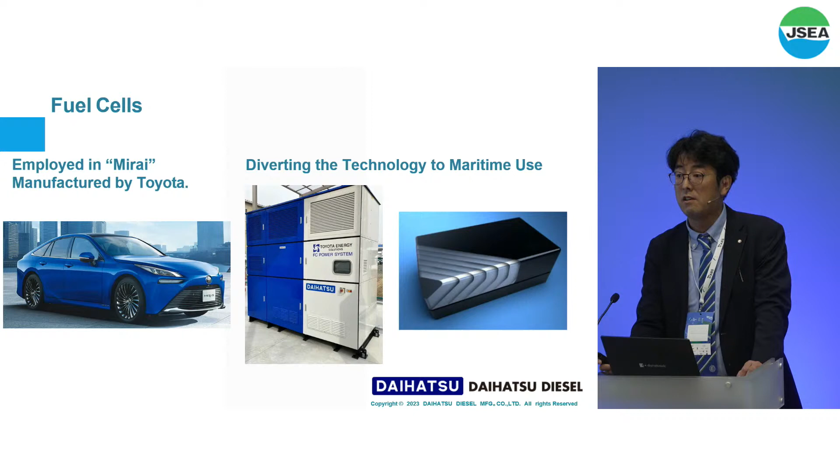Furthermore, we are actively developing digital support through the utilization of artificial intelligence, AI. We are enhancing engine condition monitoring technology and advancing predictive and diagnostic techniques to provide new maintenance support.

Daihatsu Diesel aims to become a manufacturer that supports the future toward zero emission by 2050. That concludes our presentation. Thank you for your attention. We look forward to welcoming you at the Daihatsu Diesel booth. Thank you very much.

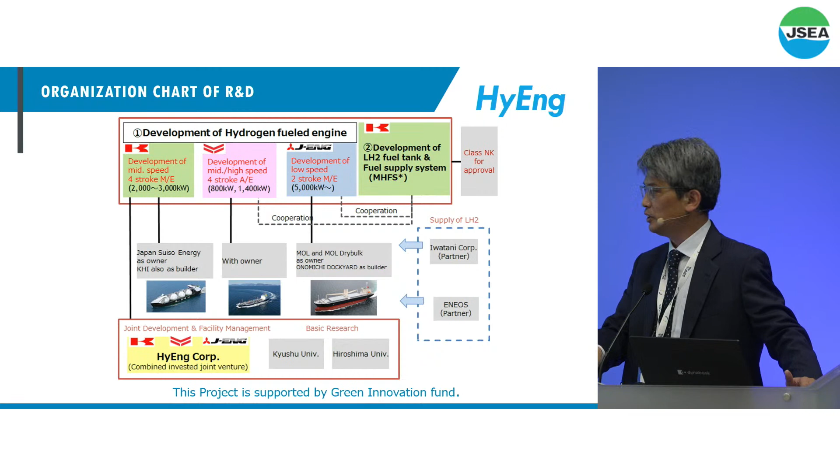To boost development efficiently, we decided to establish a combined investment joint venture company, HyEng Corporation. Kawasaki, Yanmar, and Japan Engine have already set up this combined investment joint venture for developing hydrogen-fueled engines. The target of the JV is to play the role of a development center for hydrogen-fueled engines.

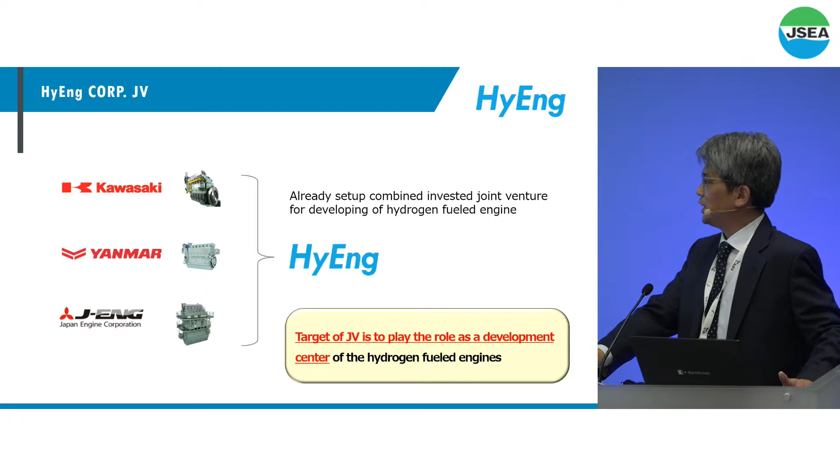So one of the most important technical challenges is hydrogen embrittlement. To evaluate the hydrogen embrittlement, we carry out the following three-step evaluation. The first step is selection of materials. From among engine parts, we pick up materials and usage environments that are of concern regarding the impact of hydrogen embrittlement.

The second stage is the SSRT test, the slow strain rate technique. We identify the environments highly susceptible to hydrogen embrittlement. If there is any doubt from the SSRT result, we proceed to the third step, the fatigue test, where we compare fatigue strength in the hydrogen environment versus air. Then we can evaluate the effect of hydrogen on the fatigue strength.

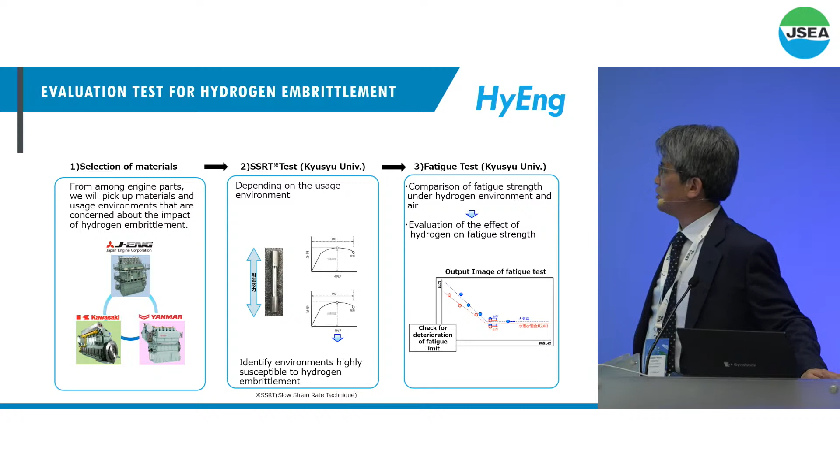One of the most difficult technical challenges is hydrogen combustion. There are many papers on automotive engines with basic knowledge, but marine hydrogen fuel engines using dual fuel combustion and a gas admission valve have several differences from the automotive engine basic knowledge. Therefore,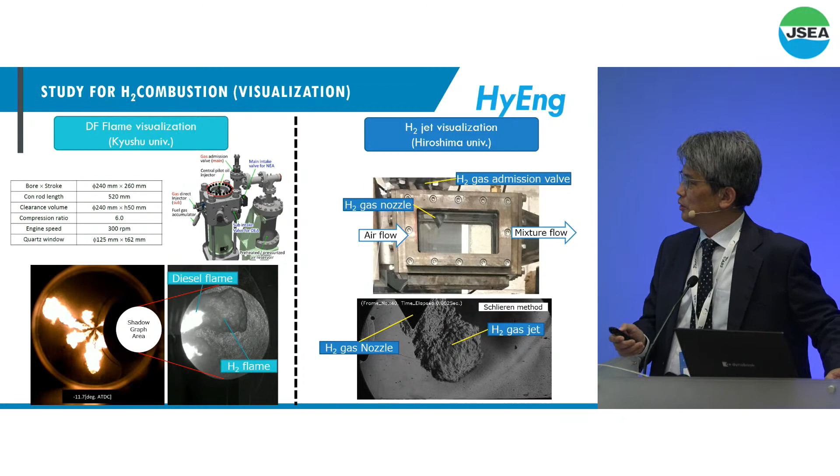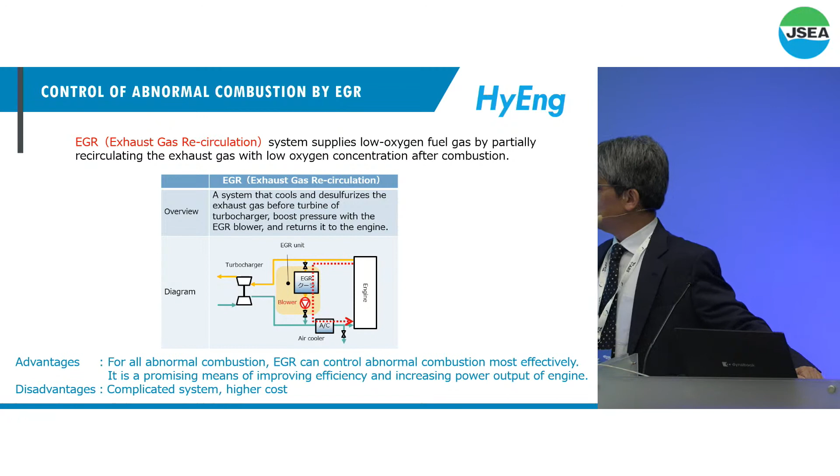To avoid and control abnormal combustion, EGR, exhaust gas recirculation, is the effective measure. The EGR system supplies a low oxygen fuel gas by partially recirculating the exhaust gas with low oxygen concentration after combustion. Previously, EGR was a well-known technology for NOx reduction, but now we will apply the EGR system to hydrogen engines. The advantage of EGR is that it promises a means of improving efficiency and increasing power output of the engine. On the other hand, the disadvantage of EGR is a more complicated system, resulting in higher cost.

Here you can see the overview of the marine hydrogen fuel supply system, so-called MHFS. The left-hand side shows the small size MHFS for the Yanmar project. The fuel is supplied by pressure build-up in the tank using an air heater, and this small size MHFS will be a container package. Verification testing on board will start from 2027.

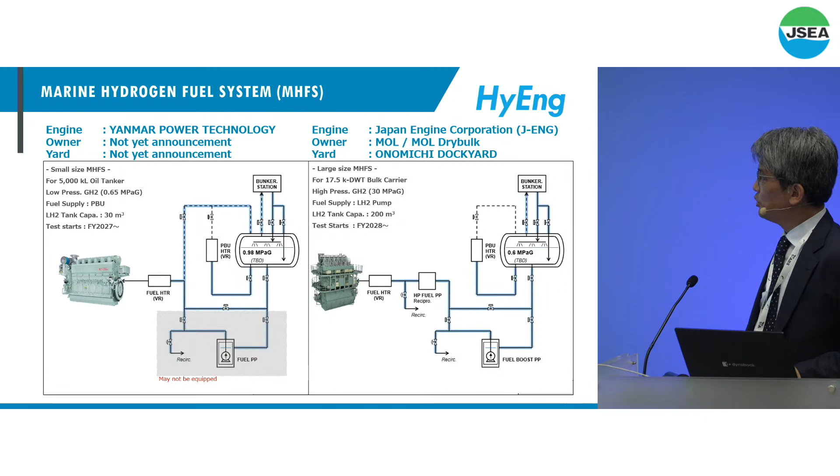The right-hand side shows the large scale MHFS for the Japan Engine project. The fuel is supplied by a liquefied hydrogen pump, and the delivery pressure is about 300 bar for the high-pressure hydrogen fueled engine. The tank capacity is approximately 200 cubic meters, and verification testing on board will be in 2028.

From here, I can tell you the current development status of Yanmar. Yanmar is developing two kinds of marine hydrogen fueled engines: one is a medium speed dual fuel type, and the other is a high speed spark ignition type. The full scale test engines are completed in 2026 and 2028.

On behalf of Japan Engine, I can show you the current development status of the hydrogen-fueled two-stroke engine. The brand name of Japan Engine's two-stroke is UE, a purely Japanese brand and one of the three major brands in the world. Japan Engine is aiming to develop the first high-pressure two-stroke hydrogen-fueled engine.

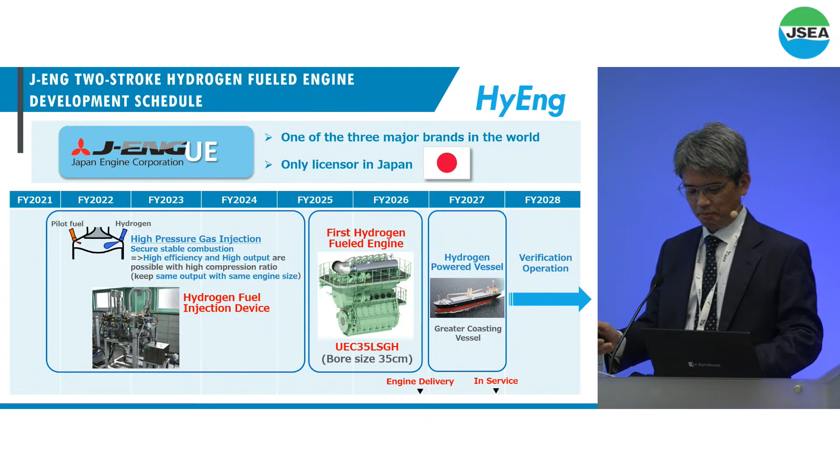That's all for my presentation. This project is supported by the Japanese government, METI, and NEDO. Thank you for your kind attention.

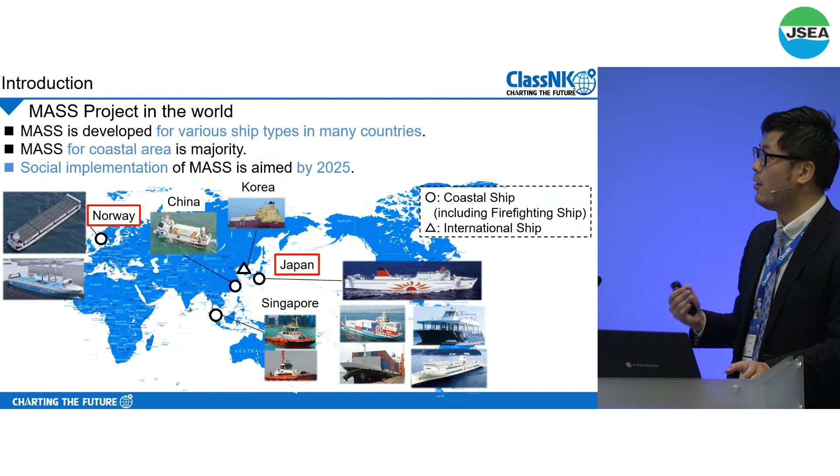As you may know, MASS is being developed for various types of ships in many countries, and MASS for coastal areas is the majority. Social implementation of MASS is aimed for by 2025. NK is also involved in ongoing demonstration tests.

On the other hand, it is necessary to develop not only the technologies, but also the rules for mass social implementation. Regarding the international rule side, the draft of the goal-based MASS Code is being developed. Just now it's being discussed in the MSC 107, and the draft of the mandatory mass code will be finalized in 2025. So in Japan, mass is expected to enter the market by 2025. So the rule side is also by 2025, which is very limited.

From this world trend in technology and rule development, people consider various concerns for safety in society. These are some typical issues, like what kind of safety requirements should be considered for this recent technology, or what tests need to be carried out for demonstration tests for safety. Furthermore, is mass really safe or really reliable from the public's opinion? This is because mass rule development and technology development proceed in parallel.

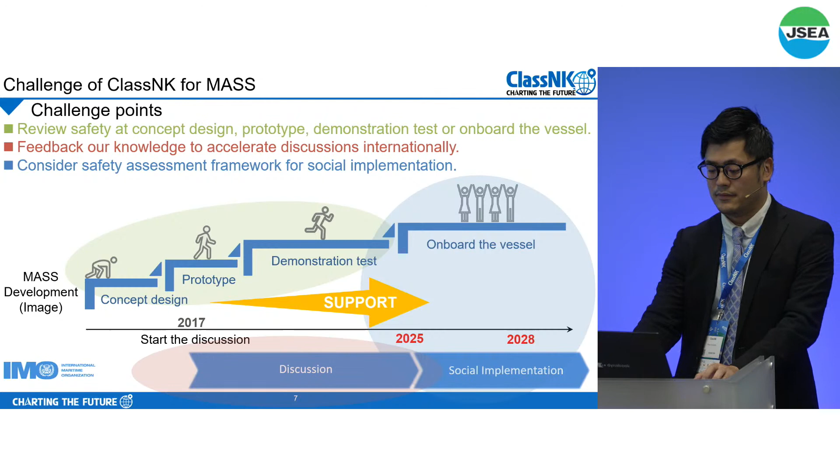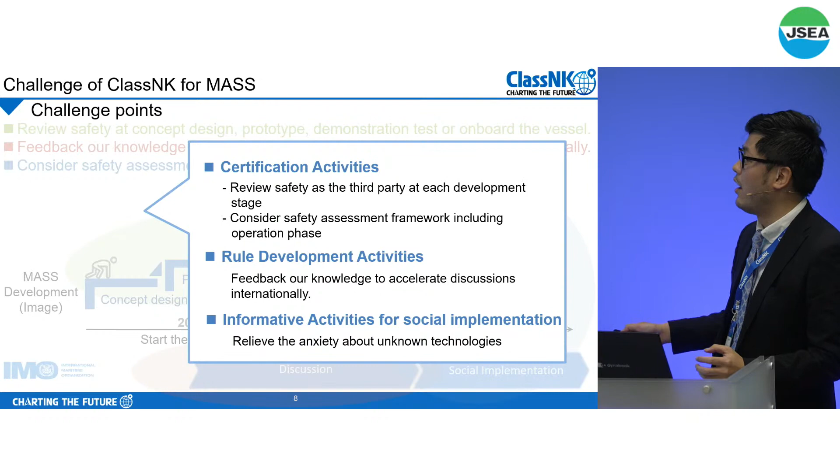In short, as for our certification activities, we review safety as a third party at each development stage, especially from the concept to design stage. We consider the safety assessment framework, including the operation phase. As for rule development activities, we feed back our knowledge to accelerate discussion internationally. Finally, besides these two points, social acceptance, like public opinion, is a very important factor. So we relieve anxiety about unknown technologies through informative activities.

In order to deal with these challenges, we established a project team and have worked towards social implementation. There are 4 main activities: certification, rule development, informative activities, and research. Research is inclusive support of the other activities.

In our previous certification activities, we would like to introduce some representative samples. In Japan, as you know, there is a big project called the Meguri project, and we were involved in the risk assessment for this project. We also confirmed the feasibility of the concept of APExS, one of the Meguri projects jointly developed by NYK Line, MTI Company Limited, and JMS Incorporated. We also granted the AIP, which means approval in principle.

As for rule development activities, we take part in the IACS expert group, and we also issued our guideline for the automated and autonomous operation of ships, and we also contribute to the flag state consultations.

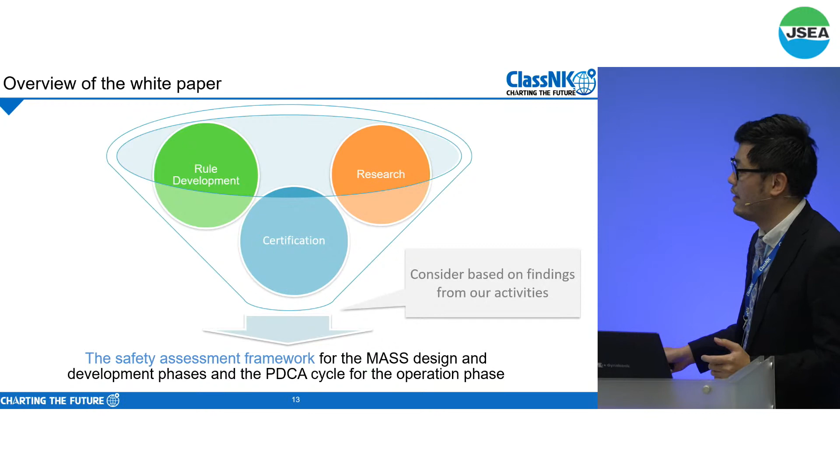In the design and development phase, as I mentioned, MASS is expected to have a variety of use cases, so it is necessary to consider what kind of technology is applied to requirements for each use case. In order to build consensus from this first step, a goal-based approach is recommended. Also, MASS is a very complex system, so it's necessary to conduct a lot of tests. If we apply the conventional way, the concept of systems engineering, like the V process, is very effective.

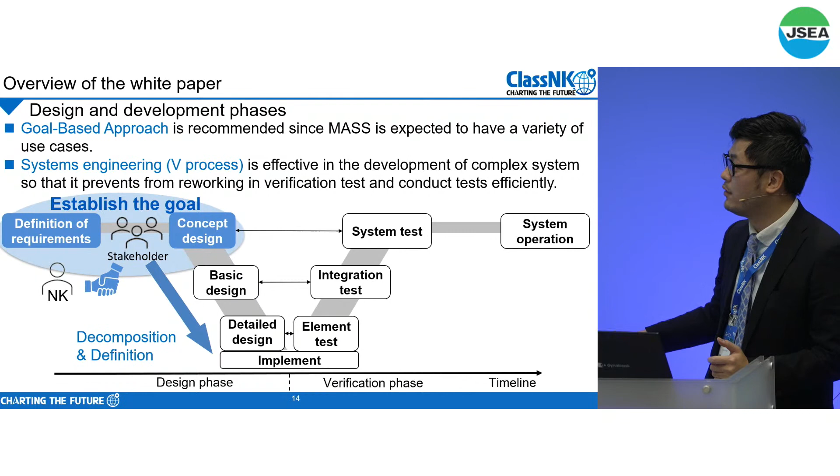So it prevents reworking in verification tests and allows conducting tests efficiently. In order to realize this concept, we propose to set the goal at first and apply the concept of systems engineering. Then we initially join from this first step, the concept stage, and confirm its upstream requirements and the tests.

Whereas in the operation phase, people consider design and implementation at this timing, but after implementation, how about check and act? How do we monitor and how do we improve these technologies? It will be necessary to devise the actual operation method after realizing the imperfections of the technology, since novel technologies are applied.

So we propose a mechanism called a vulnerability database. It is for collecting data on defects and near-miss incidents found after implementation, to constantly update regulatory requirements and evaluation methods. Overall, we propose this safety assessment framework in our white paper.

Today, I introduced our challenges and our activities, especially our white paper. Through these activities, we would like to contribute to the realization of safe and secure MASS for the bright future of the maritime industry. Thank you so much.